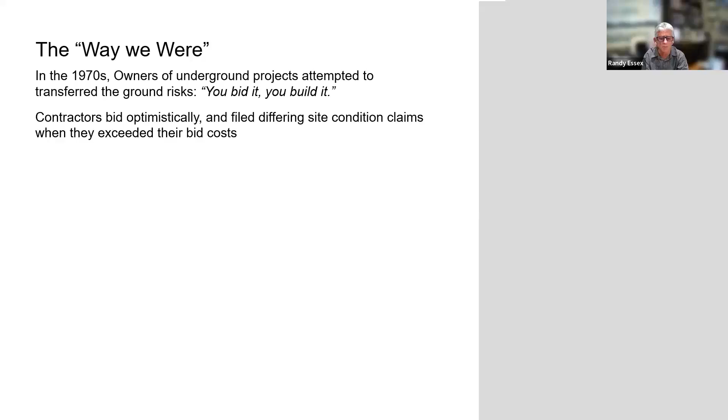When costs exceeded their bid costs, they filed differing site condition claims. The world began to revolve around the construction claims monthly, where you heard the results of various arbitrations and court cases. What we found was litigation was spiraling, and it led to bad publicity for the owners because they weren't getting their jobs completed on time, and poor financials for the contractors. A lot of them got out of the business, or went bankrupt altogether.

Not a good sign. So we realized that in the tunneling industry, if we didn't stop the spiraling of litigation, people would find different products to purchase and would not build their systems with underground work because of the phenomena associated with them. To stop the litigation, the industry produced several research reports.

One in 1974, one in 1984. These were under the National Academy of Sciences, U.S. National Committee on Tunneling Technology. And then the Underground Technology Research Council was formed under the American Society of Civil Engineers, in those days called the Construction Division, now the Construction Institute. They developed a document in '89 and then a quick update in '91.

All of these documents pointed toward four improved contracting practices that needed to be implemented to reverse this trend in litigation. One was a differing site condition clause in the contract. Another was a geotechnical design summary report in the contract. Escrow bid documents by the selected bidder, not necessarily a contract document, but made available and held in escrow. And then a dispute review board. These four were the cornerstone items that the industry felt would be critical to implement if we were to change the current conditions.

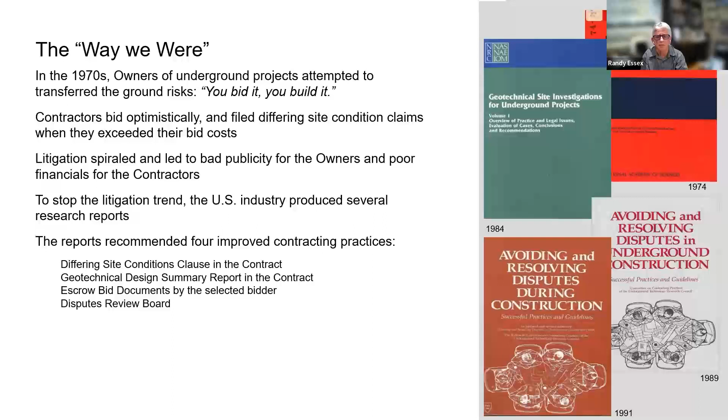Well, the industry said we really need a document on dispute review boards, and some names on this effort. This was the beginning of the Dispute Resolution Board Foundation. This is where it all began. I remember being involved in the late 80s and early 90s on how a DRB should form.

The very first DRB was in 1975 on the Straight Creek Tunnel on Interstate 70 in Colorado. But with growing credibility and very positive statistics, a manual was developed, and now its latest version is obtainable for free on the DRBF website.

Another item they said was we really need a document on these geotechnical reports. In those days we called them geotechnical design reports, and for a lot of reasons we changed the name. I raised my hand and said, okay, I'll lead a committee. We published three different sets of guidelines. The first was the version in '97.

The second, ten years later, earned a reputation globally as the Gold Book. One was just published in the last month or two, with a strip of silver at the top. Maybe we call it platinum, maybe we don't, but maybe we'll just call it the book. That's the latest compilation of lessons learned—and I'd say lessons learned and forgotten—but that's the latest and greatest.

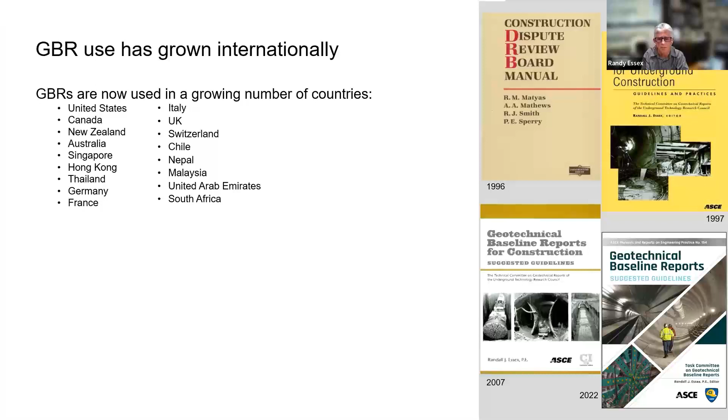The reality is GBR use has grown internationally. These are just some of the areas around the world using geotechnical baseline reports, and as you can imagine, they're also using different forms of contract. The GBR is not a plug and play phenomenon—it has to conform with the general conditions of contract wherever construction is being implemented. That's something we'll touch on briefly and get to a little later.

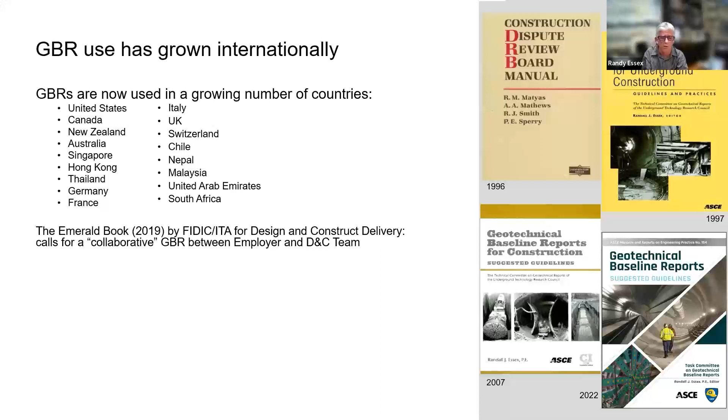The Emerald Book was jointly produced by FIDIC and the International Tunneling Association. The Yellow Book is FIDIC's design build guideline, and the Emerald Book is a variation of the Yellow Book specifically for underground construction. They require a collaborative geotechnical baseline report between the employer—we call them owners—and the design and construct team.

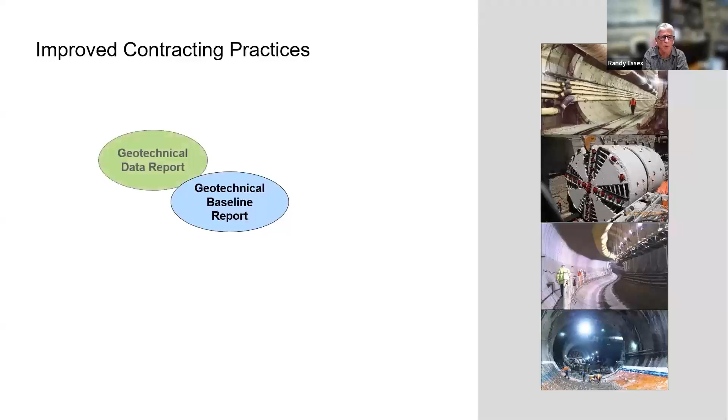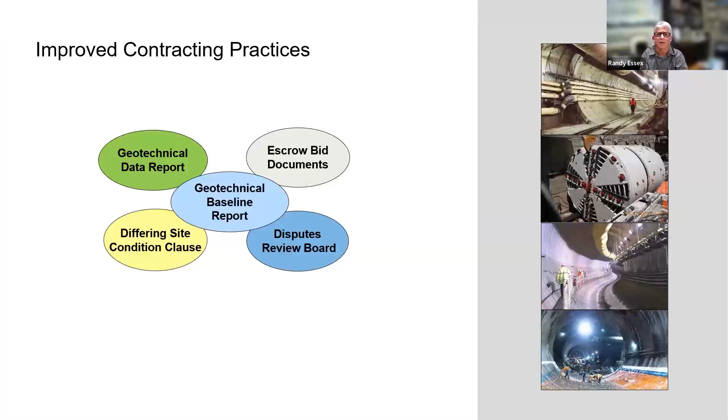So for improved contracting practices, we've got the baseline report, the geotechnical data report, the differing site conditions clause, escrow bid documents, and the dispute review board. The geotechnical baseline report does not function and is not effective by itself. It's not a silo, it's not a pedestal. It demands integration in development of the documents, and also in execution and resolution of disputes, to ensure each element in the contract does its job. The dispute review board is a critical element of ensuring fair contracting is implemented, not just at notice to proceed, but throughout the work.

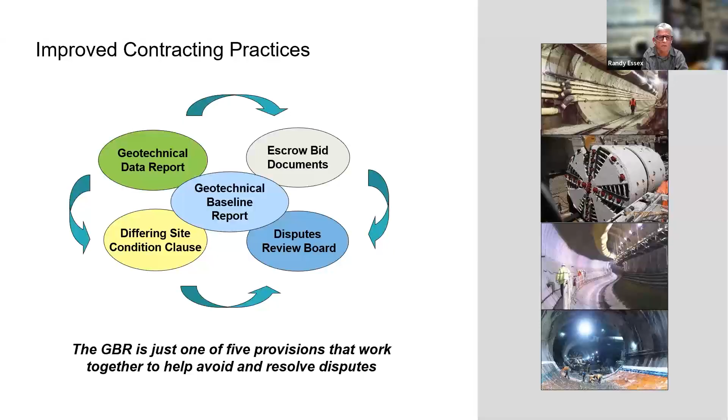Some of the fundamentals of GBR owner's obligations: the owner owns the ground. The owner should expect to pay a fair price for the work required to be performed by the contractor for all conditions encountered during the work, whether known at time of bid or not. If we had X-ray vision, we could see the ground, assess all the risks, and wouldn't have to worry about a differing site condition clause—but we don't have X-ray vision.

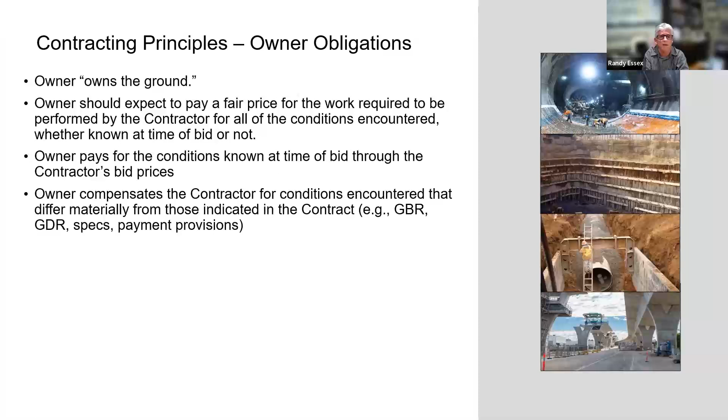Owners pay for conditions known at time of bid through the contractor's bid prices, and they need to understand the importance of compensating the contractor for conditions encountered during construction that differ materially from those indicated in the contract. It's not just the GBR—it can be in the payment provisions, it can be in the specifications. It varies with how the contract documents are developed.

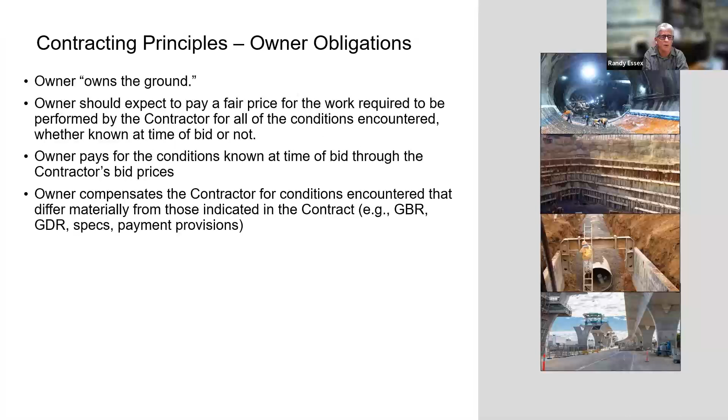On the contractor's obligation side, the contractor owns the risk for all ground conditions and risks identified in the contract, including the GBR, the data, the specs, the payment provisions, etc. Contractors are responsible for the means and methods and any events and impacts associated with those means and methods not specifically related to ground conditions—workmanship, downtime for delays.

It's important that a contractor has every right to bid below the baseline, but they take on commercial risk in doing so. When a differing site condition circumstance arises, it's not about what the contractor's bid price reflected—it's about what the costs of the work were as reflected in the baseline. These have value not just in the contract, but in the bidding process.

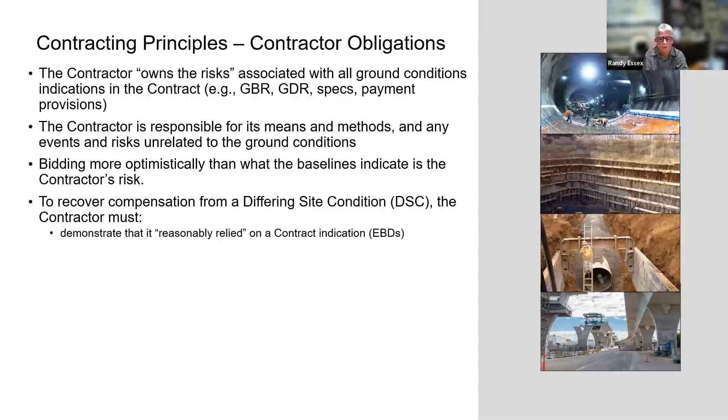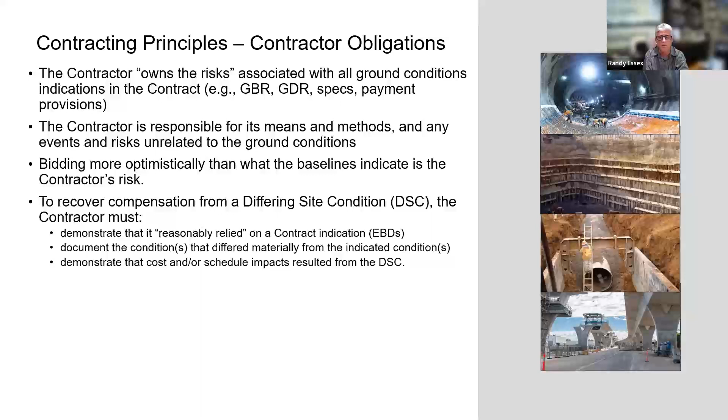So for a contractor to receive compensation under the DSC clause, they've got to demonstrate that they reasonably relied on the contract indications. The value of escrow bid documents is that for contractors who bid fair and square, they value EBDs as a means for verifying what they based their bid on. They need to document the conditions that differed materially from those indicated, and they need to demonstrate cost and/or schedule impacts resulting from those DSCs. Those are the three chains in the process, and they need to meet every one of them.

So it's not a risk-free proposition for the contractor to have a GBR on the job. There are a lot of responsibilities the contractor continues to carry. Basically, the GBR is a risk allocation document. Think of it as a line in the sand: on one side within the baselines is the contractor's risk, and beyond the baselines is the owner's risk. There are a variety of ways of managing those risks.

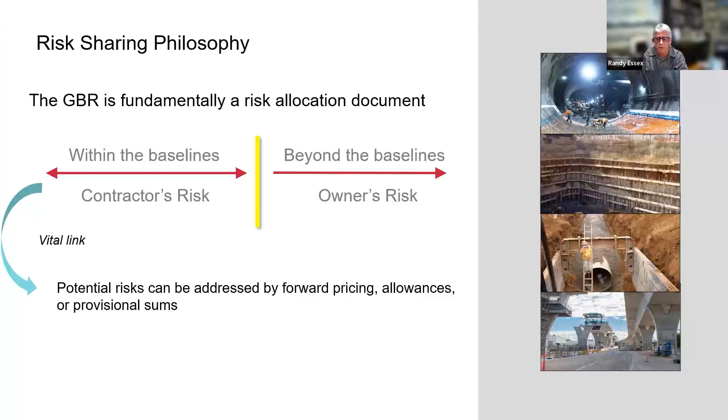Potential risks not in the bid can be addressed by forward pricing, allowances, provisional sums, and how we connect those clauses is a vital link that determines how the contract performs, so that we're able to resolve disputes through contract administration, not dispute resolution.

So the data report versus the baseline report. The data report is factual. It's all the information obtained during exploration and lab testing: boring logs, laboratory test results, photos of lab samples, etc. No interpretation, just the data.

On the baseline report side, it's the single contractual interpretation of the expected subsurface conditions, and it's a level playing field because all bidders bid the same set of conditions. There are physical baselines that talk about intrinsic properties of the ground, and behavioral baselines that connect with the means and methods the contractor implements during construction.

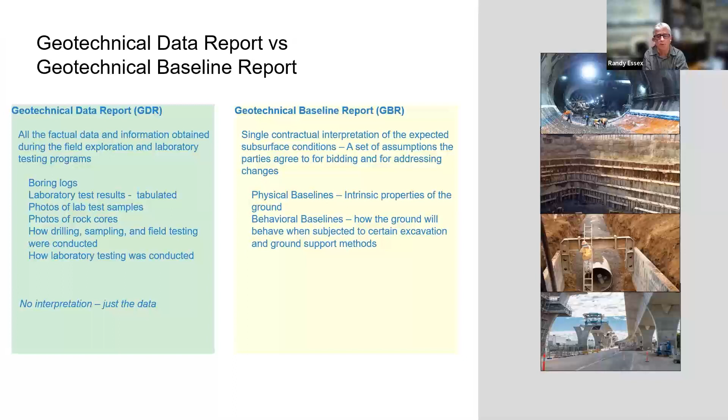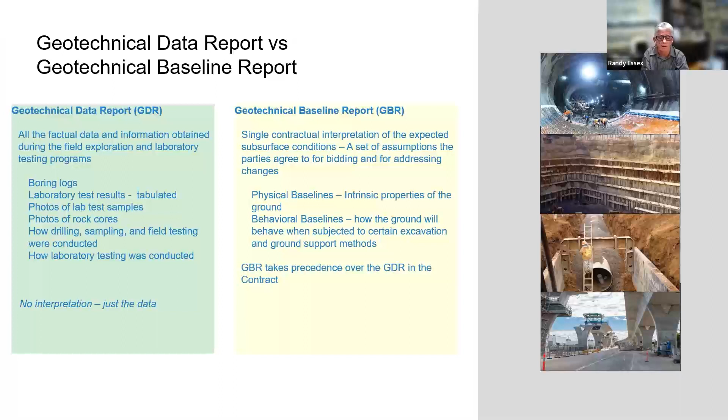The GBR takes precedence over the GDR in the contract because the GBR can be based on matters other than just the data. I'll talk about that a little bit later.

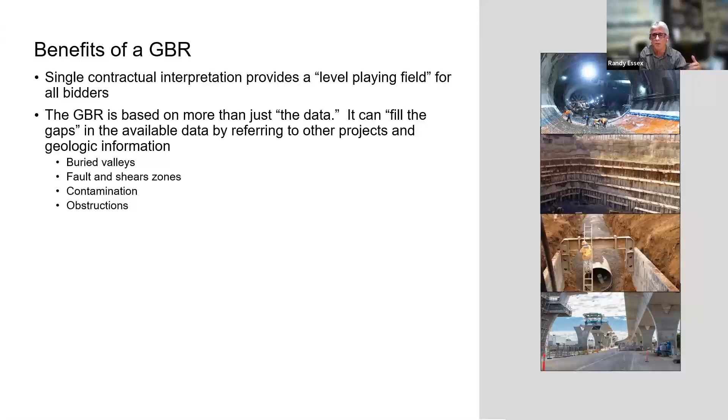Some of the benefits are named here. If there's a geologic model like a Horst and Graben system up in the peninsula in Michigan, that structural geology gives rise to vertical joints. Vertical borings are not effective or efficient means of detecting vertical joints, and it's very difficult to detect boulders, degree of contamination, or obstructions. So there's an opportunity for the GBR to contain provisional baselines that go well beyond the data, and that's why the GBR takes precedent over the data report in the contract hierarchy.

So other benefits: because we have a tool, the DRB can say, well, let's look at what was indicated in the GBR. What did the contractor price, and how did the conditions encountered differ from those indicated? Hopefully there's less acrimony, stronger partnerships, particularly using design build, where we emphasize the importance of a collaborative GBR. I'll talk about that in the contents of the updated publication. And there's less distraction from contentious work.

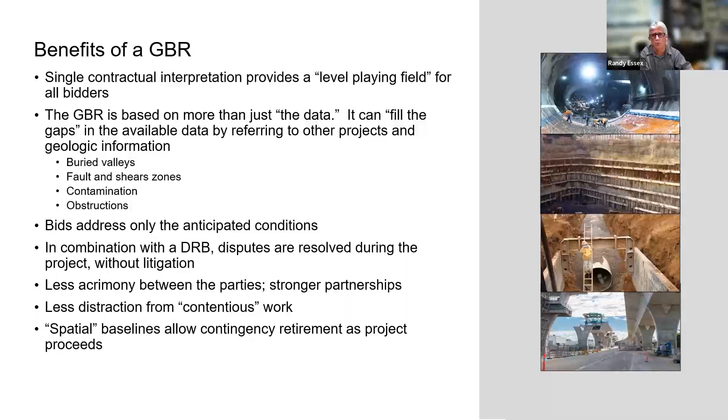There's also an opportunity to create baselines that are spatially oriented. Think of it as tunneling reaches, or maybe just a shaft or whatever. By ascribing discrete baselines for those conditions, you have a contingency fund that looks across the entire job. It gives the owner the opportunity to retire contingencies for specific areas of work as those elements of work are accomplished.

So let's now turn to the new GBR publication. I got to tell you that the process we went through was an intense one. It's the third time we've done it. We picked up on a lot of lessons learned from the first two. We developed a committee, and the first group were what we called the writing subcommittee, a cross-section of individuals from the industry.

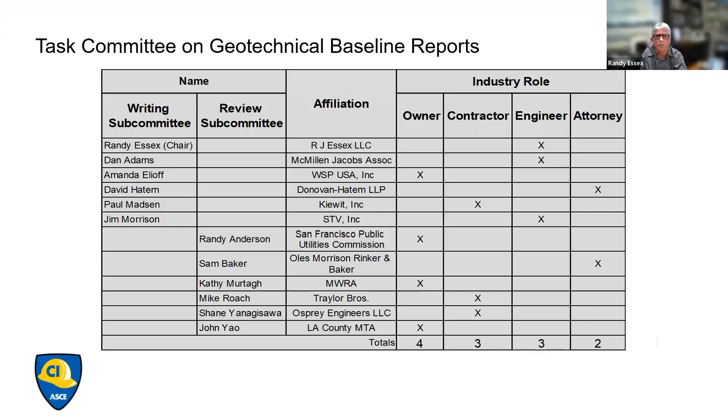We also had a review subcommittee, also a cross-section of individuals handpicked from the industry. As you can see, it was a blended group of individuals: 4 owners, 3 contractors, 3 engineers, and 2 attorneys.

And what was the update process? Well, we started in June and July of 2021, and we formed this committee, both the writing and review subcommittees. In August through September, the writing committee primarily focused on what's broken, what we need to fix, and what the elements should be that we frame for the very first working session, where we reach out to the industry in a workshop held in conjunction with the Cutting Edge Conference in November.

They fed back on the items they felt were broken, what was working from the Gold Book standpoint, and what wasn't. But one thing we found was that while well attended, with some 65 attendees, they were primarily engineers. There wasn't enough feedback from owners and contractors. So during subsequent months, we had specific outreach to owners and contractors and got their feedback.

Based on that collective information, we wrote a manuscript, and then in March we sent it to the review committee for review. We took their comments in April, incorporated them, and created an updated manuscript, distributing it to some 50 registration attendees at a workshop at the George Fox Conference in May.

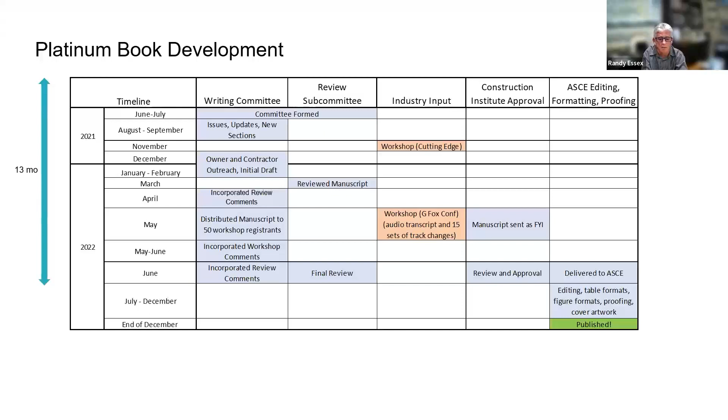We delivered the final work product at the very end of June, beginning of July to ASCE. From that point, we began an editing and formatting effort, and that took a long time. At the end of December, we published it. So in retrospect, it took us 13 months to extract feedback from the industry and produce the publication, and another 6 months for ASCE to publish it because they had strict formats. It's an involved process, and it was fairly intense.

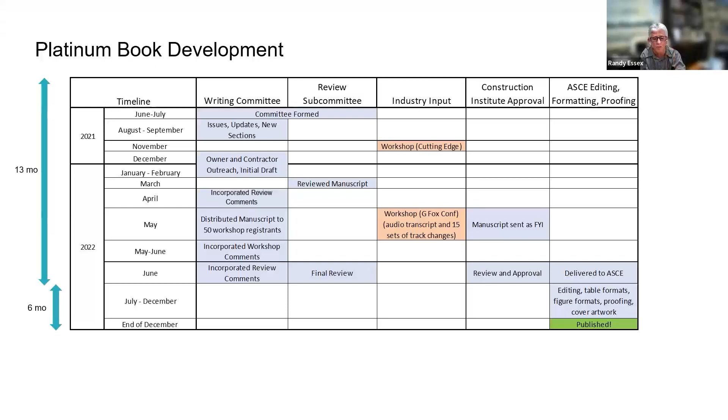Over those 13 months, we had conference calls every Monday by standing order. If we didn't need it, we canceled it, but it kept the metronome, the staccato version. And we think we've developed a fairly tight document.

Table of contents. Al Mathews was one of my mentors. He was a driving force in some of those early publications, and a driving force in the creation of the Dispute Resolution Board Foundation. There's an annual award given in his name. He certainly deserves to have this dedication.

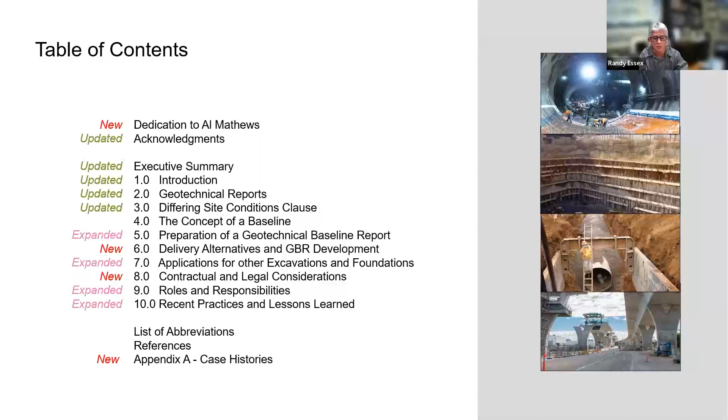These are the new chapters that have been created, or pieces of text. These are the chapters that have substantially been expanded, and these chapters have been updated. I've got to say that the amount of change we've achieved between the gold and the platinum greatly exceeds the changes we executed between yellow and gold, so there's a lot more work that went into this effort.

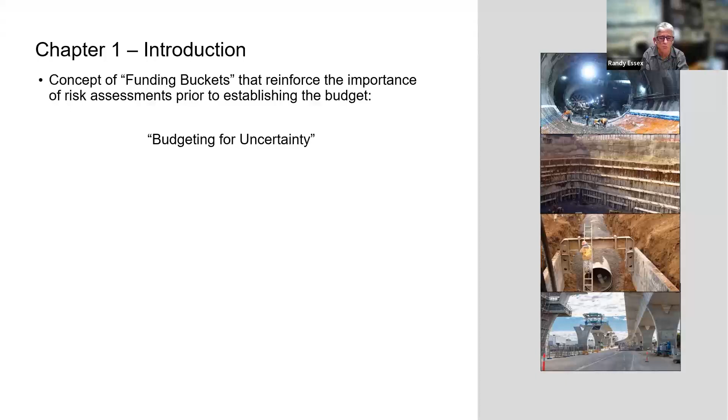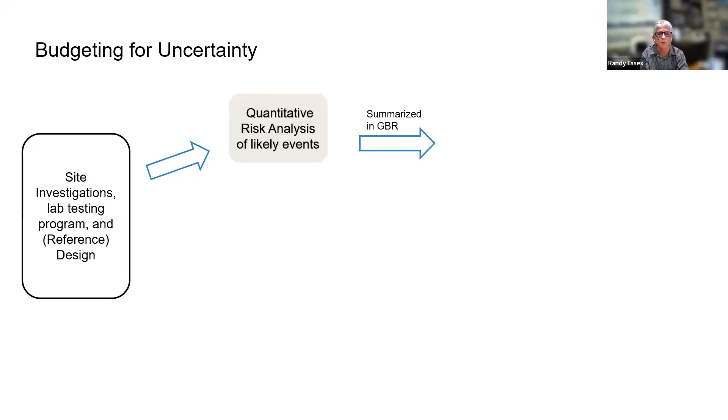In chapter 1, I would say the key message is budgeting for uncertainty, and we have this graphic in there. Really, the GBR is the consequence of a risk assessment strategy. We're finding that projects aren't implementing risk analyses sufficiently and thoroughly—site investigations, lab testing, whether you're doing a design-build where you're creating a reference design, or design-bid-build as a guideline design. You identify through a quantitative risk analysis what the likely events are that you expect to occur on the job, and those are the circumstances summarized in the geotechnical baseline report.

How you fund that work is, let's call it a blue bucket. These are the known knowns, and whether it's a target price or a bid, that's where the contract is established around what we think we're going to encounter during the work.

Well, there may be some elements in the work that are known to occur, but we don't know how much they're going to occur—obstructions of man-made features, leftover from past construction. This happens often in urban areas. Hyperbaric interventions are going to be necessary, but how many? And contamination—disposal costs are horrendous impacts to the job. We need a way of measuring and compensating the contractor for just how much contamination has to be handled, tested, and disposed of.

So we set nominal baseline limits for these costly items. If we included conservative estimates, it might blow the blue bucket out of the water. So we set more nominal baselines, and we can set aside provisional sums in a separate bucket for these medium probability, high cost elements—those are the known unknowns. The value is that those are only paid by the owner to the contractor if the quantities are exceeded. The most important stage, I feel, in terms of overall understanding of our underground business, is to conduct a quantitative risk analysis of the unlikely events.

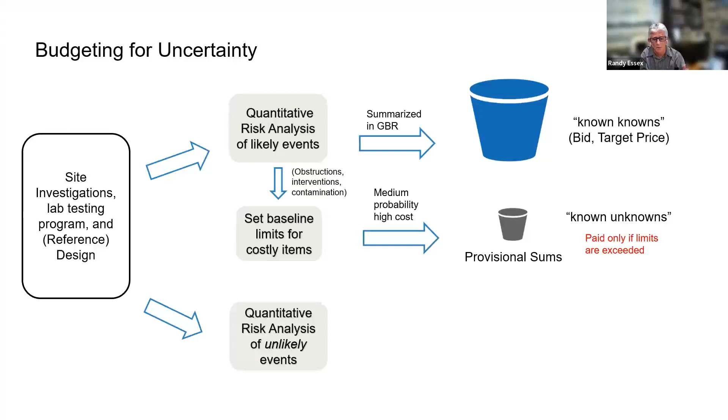And it's just not my opinion—everybody, this really rang the bell with everyone saying this needs to be done. It's not being done, and it can cause a greater awareness of what's happening if we do it. So these are the unlikely events likely to occur—low probability, potentially high cost. Whether we look at it at P50 or P95, the consummate cost of dealing with those high cost items is built into a contingency fund.

And that is the unknown unknowns that can only be discovered during construction. Again, as for the provisional sums, they are paid only if conditions are encountered.

Now, this is the punchline: some owners feel that the blue bucket is their budget. In reality, all three buckets need to be their budget. We're finding that if owners participate in the risk analysis of unlikely events, and understand what the contingency fund is there for, they've accounted for it. When it comes to paying a claim, it's not viewed as a loss, it's viewed as a cost.

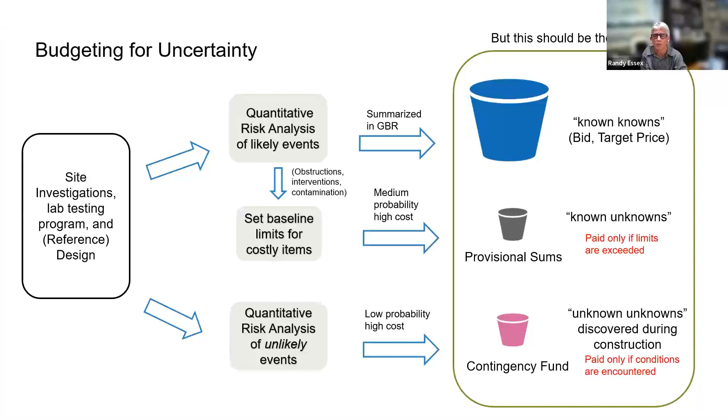I think it doesn't need to be any more complicated than that to understand that the ground conditions are what we know at time of bid and what we encountered during construction that we didn't know at time of bid. If we can manage our process this way, hopefully we require fewer dispute review boards and other elements of dispute resolution. So chapter 5, preparation of a geotechnical baseline report.

We provide a suggested outline that I'll show you. There's a concept of trying to shrink the size of the GBR. It should not be a master's thesis, it should be short and snappy so that contractors can understand it quickly. Focus on the construction. Design matters are not typically the drivers of claims, which is why we changed the title of the document from Geotechnical Design Summary Report to Baseline Report for Construction, parenthetically.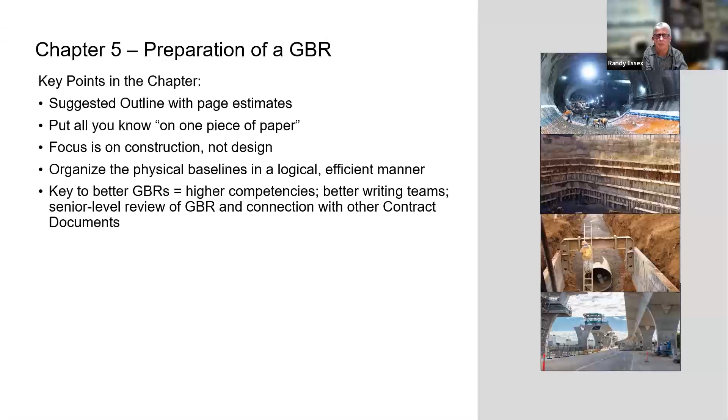Organize the physical baselines in a logical, efficient, and visual manner. We're finding that if we assemble GBR writing teams with the right experience, the right expertise, the right qualifications, this will result in a better work product, and we'll have less disagreement about what the GBR intended to convey. I'll talk about that a little bit later as well.

So this is the outline that is suggested in the guidelines, and it's based on dozens, if not hundreds, of GBRs that have worked. This is a very efficient technique that's worked for simple projects and the most complicated transit projects.

This is the challenge. We recommend page counts because we found that GBRs are being written by people who seem to emphasize being repetitive, redundant, and duplicative, if you get my point. Say it once, say it the best way you can, and cross-reference from there on. Those first 5 chapters should take no more than 7 pages.

The ground characterization, depending on the complexity of the geologic setting, can take anywhere from 12 to 17 pages. If they're taking 30 pages, they're writing a thesis. And it's a good cross-check to say, trim it back.

Don't restate what's in the geotechnical data report. Just focus on the stuff that's critical on the job to resolving disputes. We don't need to baseline Poisson's ratio. We don't need the baseline modulus of subgrade reaction. Those are design parameters, and we can baseline those types of parameters elsewhere. But this area focuses on what elements of the ground will most influence the construction.

Previous relevant construction experience is critical, 2 to 4 pages, depending on how evolved the environment is for tunneling construction. Construction considerations is really the behavioral phenomena tied to means and methods, and depending again on the complexity of the ground and the different components of construction to be implemented, this can run from 10 to 15 pages.

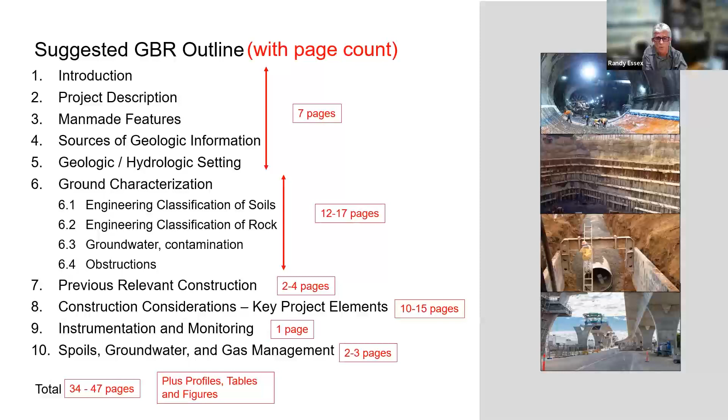This is quite manageable. We just implemented a very complicated P3 project under Queen Street in Toronto. It's part of the Ontario line, and I believe the page count was something like 42 pages. It doesn't need to be a tome. It can be short and snappy, and this will help authors and reviewers of documents guide to be sure that we pare this down to just the essentials.

So present baselines once without repeating. How can we do this?

We need to write descriptions once, then cross-reference them. Physical baselines are most effectively conveyed visually. I'll show you an example.

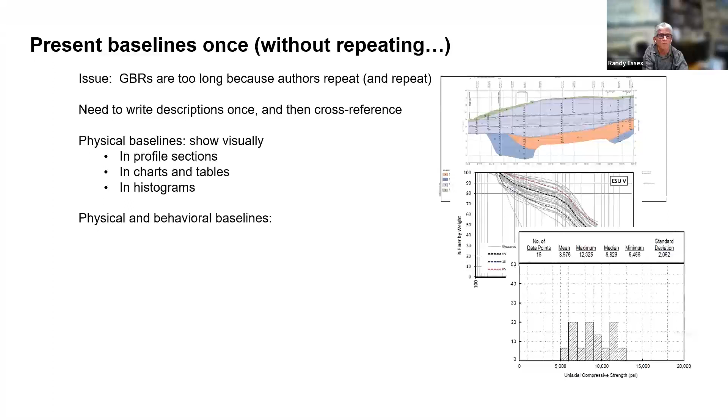There are geologic profiles. We can have soil gradation curves, histograms - these are very visual. For physical and behavioral baselines, we can have a single table, consolidating the physical and behavioral all on one piece of paper. One of my first bosses was Arthur Chase with the A.A. Mathews Company, and he said, put everything you know on one piece of paper. That's the mantra, and it works.

Group strata and ground types by engineering classes. We find that baselining according to geologic nomenclature doesn't work. A good example: on the Beacon Hill project, there were 27 different strata that could have been baselined - Vashon, pre-Vashon, these are glacial deposits. We were able to consolidate those 27 different strata into 6 different engineering classes, and we baselined them.

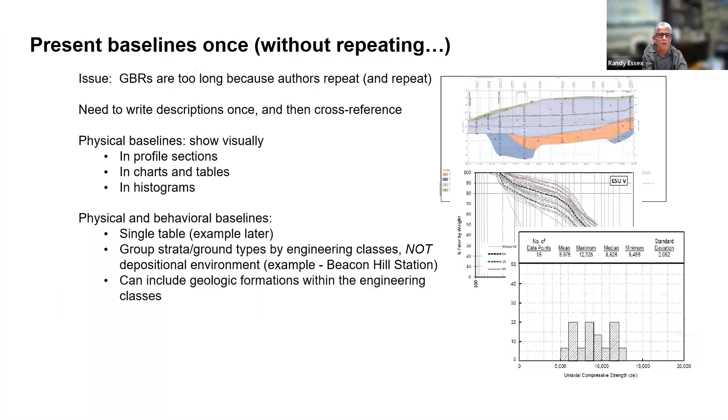We can include the geologic formation nomenclature within the engineering class definitions. That's certainly possible. What you find out is you can have more than one geologic stratum behaving in a like manner. The kind of stuff that controls ground behavior during construction is not what name we gave it in the geologic storytelling - it's how do we expect the ground to behave.

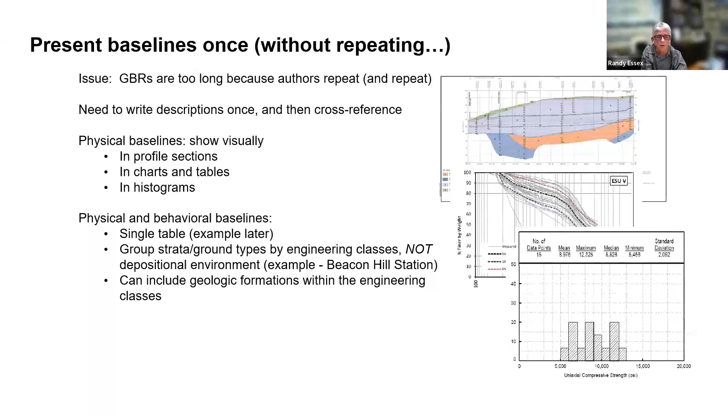This is an example of a different project we did for a transit job in Toronto. In the first column is the engineering class. The colors are coincident with the geologic profile. We provide a material description of the engineering class, with a connection to the geologic nomenclature to see what materials associate with those behaviors.

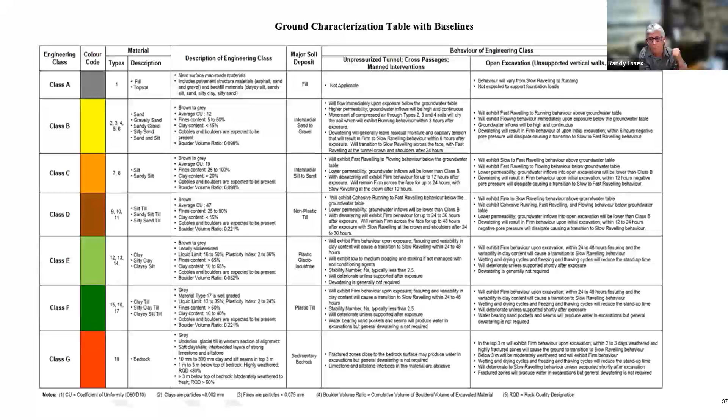These columns describe what the anticipated behaviors will be, either in the subaqueous condition that's unpressurized, or in the open air condition where just gravity is controlling. This table may be more than one sheet, but the value is in the geotechnical baseline report - rather than restating a baseline, it says see table 4-1 for the baseline statements, and they're all here. There are graphs that show material properties physically, and it's perfectly acceptable in the physical characteristics to reference visual characteristics of material properties.

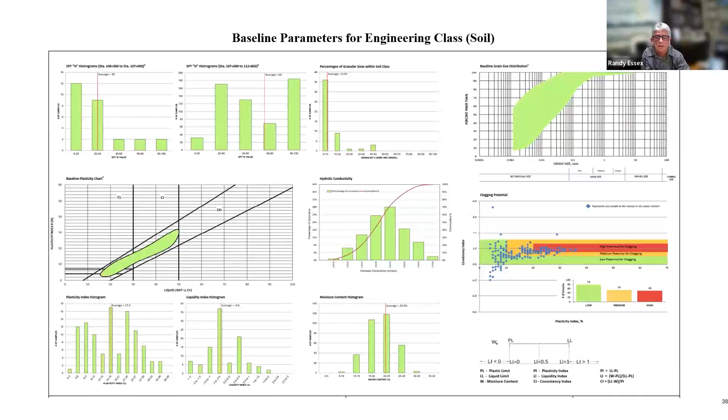Here's an example of one for soils, where SPT blow counts, grain size distribution, plasticity, moisture content - here's an old version of Markus Thewes's clogging potential, and a later version of it. But the beauty is for multiple strata to have the same information for each soil class presented in the same graphic concept. You begin to learn the differences between one stratum and another simply by looking and comparing the histograms and the charts, table to table to table.

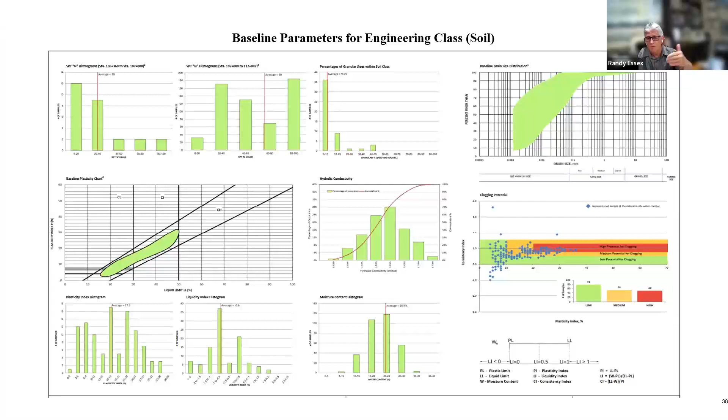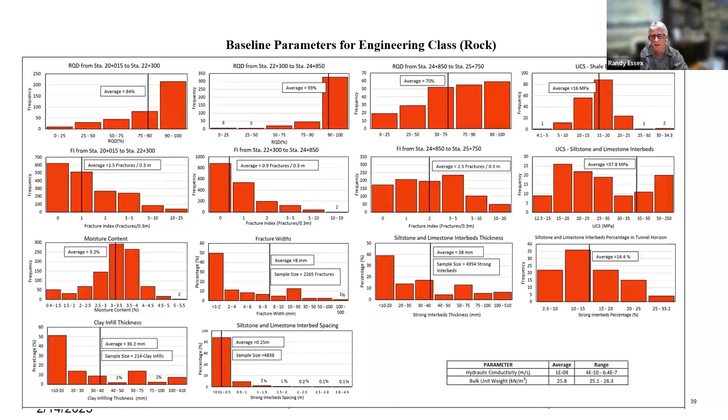Again, each rock formation or each engineering class can be stacked in the same fashion so that we develop a visual mechanism. Using these tables probably saves, I'll say, 5 to 7 pages of text and maybe 20 pieces of paper in the document. I think it shows value - put it on one piece of paper. It's going to be a lot easier for people to understand and integrate and price.

So baselines can also be sentences, and these are warnings of anticipated behavior in the construction considerations. The soft ground soils can be expected to exhibit flowing conditions if balancing face pressures are not maintained by the EPBM at all times. That's a risk transfer - this ground will be unstable, and there'll be consequences if that instability is able to manifest.

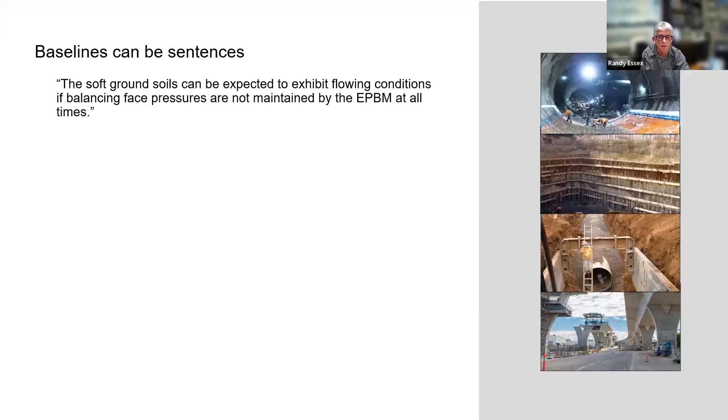There's a couple of others here, but in time I'll move on. There are plenty of examples that can pop up, and there are some in the case history section at the end of the publication.

This is where there was a Dispute Review Board Foundation workshop at the RETC in 2021, and one of the conclusions from that workshop was, if we could write better GBRs, we'd have fewer disputes. It all begins with having a multidisciplinary team participate in the writing of the GBR. It starts with an engineering geologist who understands the geologic setting, conceives of a ground model of what the geologic conditions will be on a micro scale and a macro scale.

Some of these features may not be detectable by investigation, so it's valuable. The geotechnical engineer is one who deduces the ground characterization from exploration and develops these parameters, and is also able to connect those parameters to other elements of the specifications. The construction specialist needs to weigh in on understanding the equipment, the means and methods, and the diverse ground behavior and conditions that will have to be overcome.

Elements like gas, obstructions, contaminations, sensitive facilities are all critical in understanding what tools the contractor has to bring to the job and what risks need to be described in the geotechnical baseline report, so they gain an appreciation in what is a fairly short tender period.

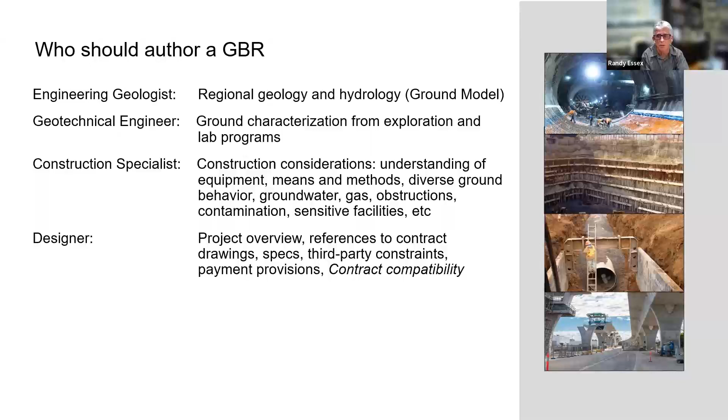The designer takes this information and makes sure that there's effective connectivity between what's written in the GBR and what's written in the specifications and shown on the drawings. Third-party constraints, payment provisions - the key is contract compatibility. And if you can resolve the compatibility among these different contract documents, you're probably eliminating three-quarters of your risk.

One key concern: just because geotechnical is in the title does not mean that the GBR should be written solely by a geotech. Where we have this go on is owners say, well, we're going to have this geotechnical consultant do the exploration, and they're going to write the geotechnical baseline report. That is not a workable scheme.

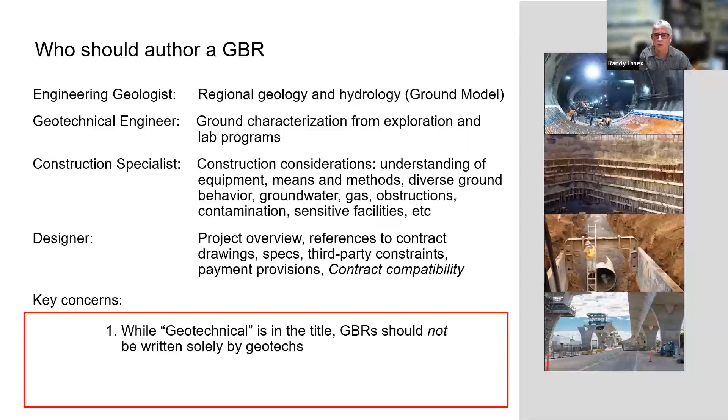You have to have one who's developing the design understand how to connect the GBR to the specs and what construction constraints are imposed, because they may limit certain means and methods. That element also has to be in the GBR. It can't just be written by the geotech. The GBR must be prepared and reviewed by professionals with the right competencies and the right experience, and this is pretty heavily reinforced in the guidelines.

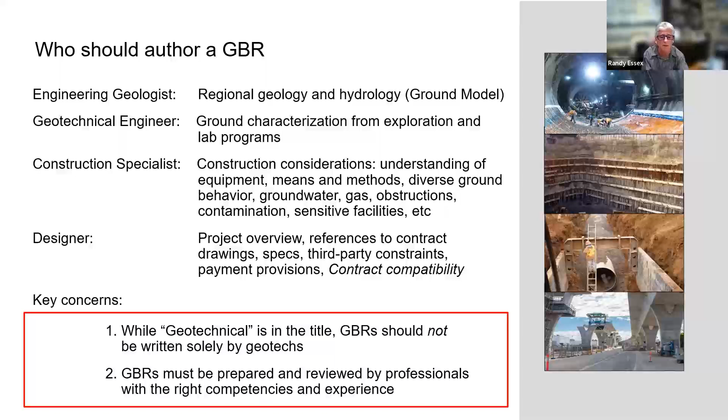Delivery of alternatives. One thing that's going south in this industry is owners like to use design build, but they're not really implementing design build. Design bid build is rarely being used, but in one workshop I asked the question, is design bid build dead? And the response was no, because we really know what we're getting.

So we've got to get back on the rails to understand what's required for design build. And the same rules that apply to design bid build should apply to design build as well.

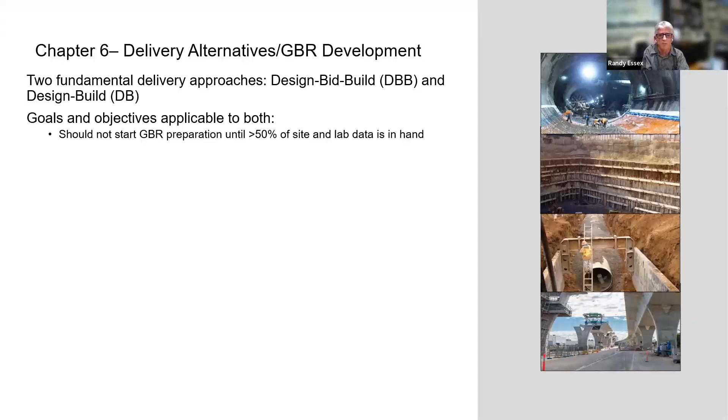You really shouldn't start the GBR preparation until more than 50% of the site and lab data is in hand. Another is you don't issue a notice to proceed for construction until site exploration is substantially completed and reflected in the GBR. This idea of providing principally design-focused exploration to develop a reference design and then telling a contractor in design build after award to implement its exploration program is doomed to failure.

And there are a number of projects in the past, and going on right now, where claims are raging because of new indications that were found in post-award site exploration programs.

The GBR should reflect the actual equipment, means, and methods that the contractor intends to use - not having the owner guess at what might happen. That doesn't work, it's like two ships passing in the night, if the GBR focuses on one set of means and methods and issues, and the contractor bids something totally separate.

The key differences between design bid build and design build are aligned primarily by who employs the designer. For design bid build, the designer works with the owner, and they wind up with a very strong relationship, and there's a very effective link between what the owner's risk profile is and what goes into the documents as managed by the designer.

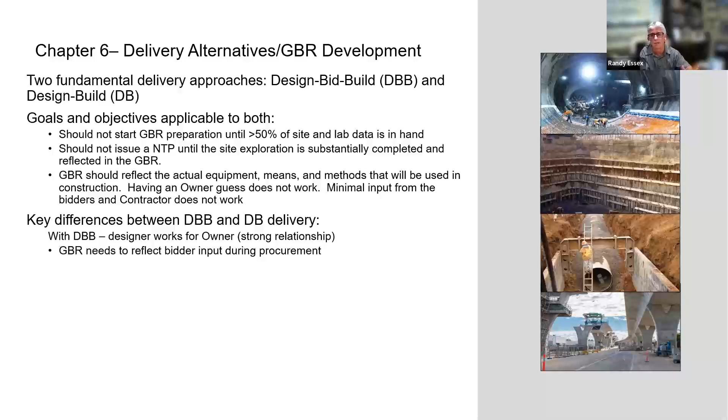The GBR needs to reflect the bidder's input during procurement as well. You can have RFIs, and there needs to be a willingness for the owner to adapt, modify, and resolve ambiguities raised in the procurement process for design bid build.

For design build, the designer does not work for the owner, and they may have a poor or non-existent relationship. It may be strained because there's three horses in the design build race, yet the owner seeks the full design risk transfer.

There's other elements that go on with that risk transfer that have to be understood, and it's not going to be well understood, because the owner really doesn't get to talk to the engineer about what they're thinking. There's also a poor link between the owner and the contractor. The GBR helps fill this gap.

It requires close collaboration between the owner's initiation of the GBR and the design build team during the tender process. So having a collaborative GBR developed is described for a number of different delivery methods in the guidelines, and it really follows a lot of the virtues that the FIDIC Emerald book reinforces, and there are variations on the theme in the guidelines.

ECI, CMAR, GCCM - these are all with the owner employing the engineer, and they're variations on the theme for how you get the construction manager and the contractor on board earlier in the process so that you can have this interaction.

Anyway, chapter 7, applications for other excavations and foundations. This is conveyed in the images on the screen. We found that there are other things subject to claims besides tunnels and shafts, and chapter 7 addresses that benefit.

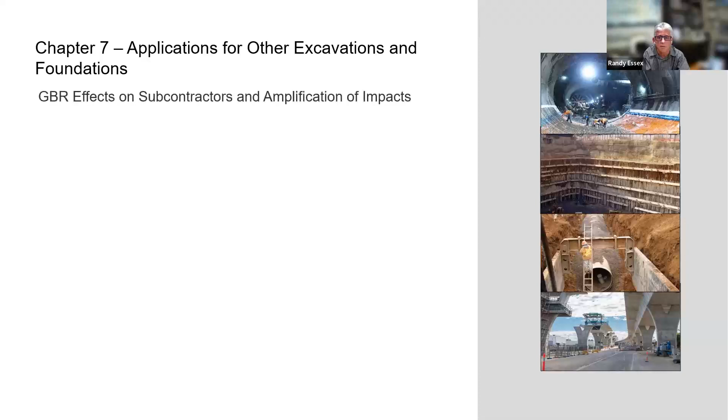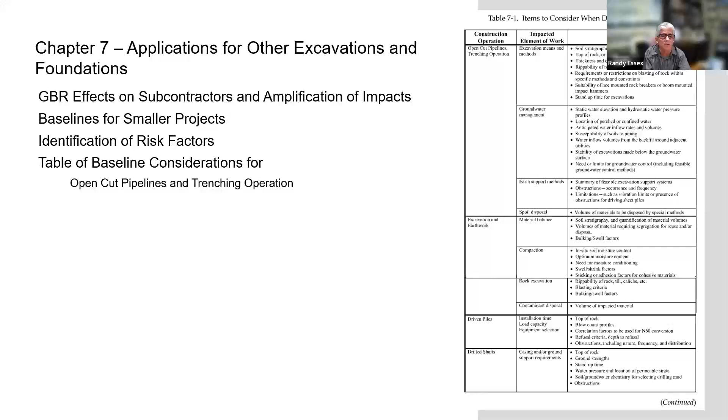These are some of the issues identified. It's a 3-page table. We look at baselines for open cut pipelines, earthworks, driven piles, drilled shafts, slurry walls, ground freezing, tiebacks and anchors, scaling of ground slopes, and horizontal directional drilling. Microtunneling is addressed as tunneling, but this is a little different, spelled out here. Dams and levees, and grouting, which is permeation grouting versus jet grouting - two different phenomena, and their successes depend on two different pieces of information.

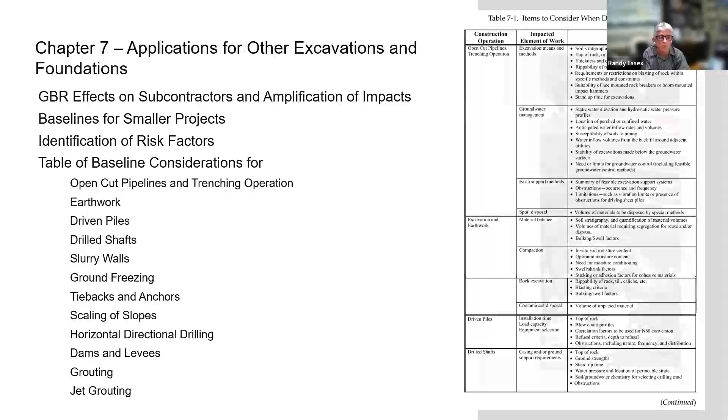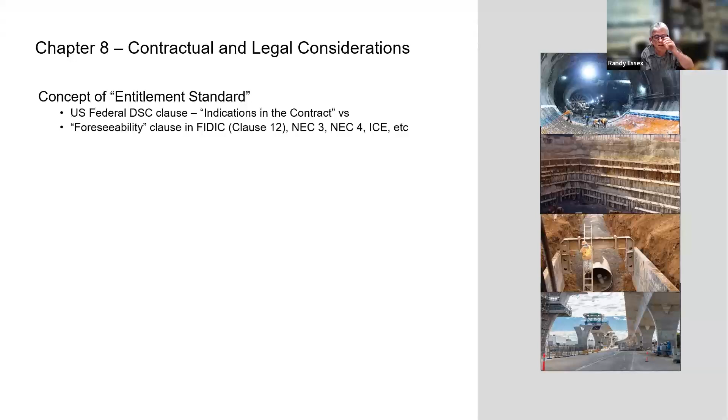So that's chapter 7. Chapter 8 is an involved effort. I think it's going to be best read by everyone because it gets into a lot of the nitty-gritty that begins to contrast our form of contract in North America versus other forms of contract elsewhere in the world, and how you address variations or different site condition claims is different. Therefore, GBRs are not plug and play, and GBRs cannot be the sole basis for determining what is foreseeable.

This term foreseeable is a trip hazard, and it exists in NEC 3, NEC 4, in ICE contracts, in FIDIC, and more work needs to be done to perceive that the GBR is not the sole indicator of what the baseline conditions will or will not be. It's the contract - there are other elements in the contract documents.

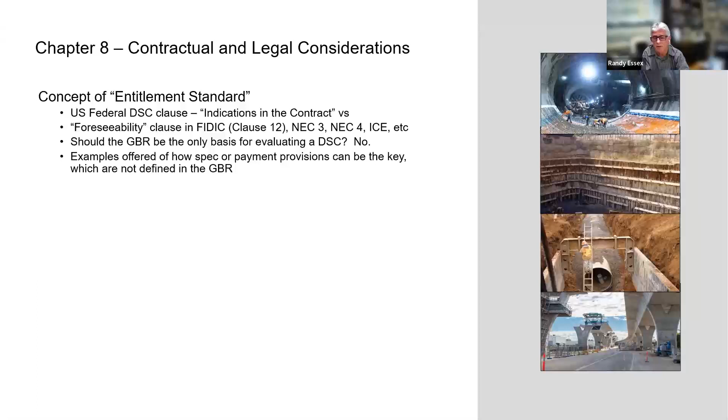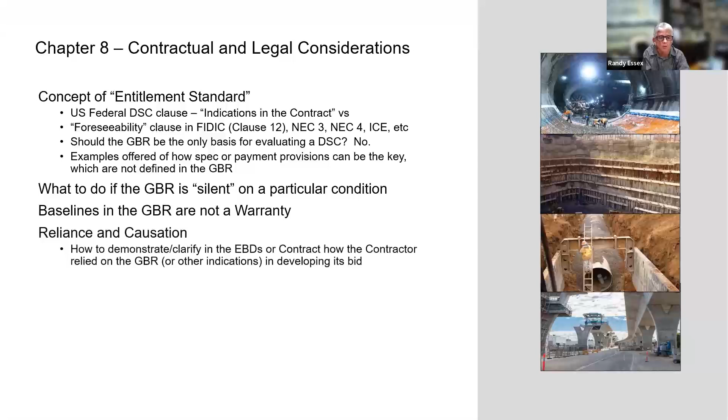What if the GBR is silent on a particular condition? The text addresses these issues. Causation - what establishes the material difference? These are some of the topics that are addressed, so it's going to be an interesting read. We didn't talk about these types of issues before to this degree of specificity. It's going to be a benefit.

Recent practices, lessons learned. This is where I'm saying that the DRB Foundation in 2021 talked about the fact that if we could write better GBRs, we'd get better outcomes. Why are GBRs decreasing in quality, and what needs to be done to reverse the trend?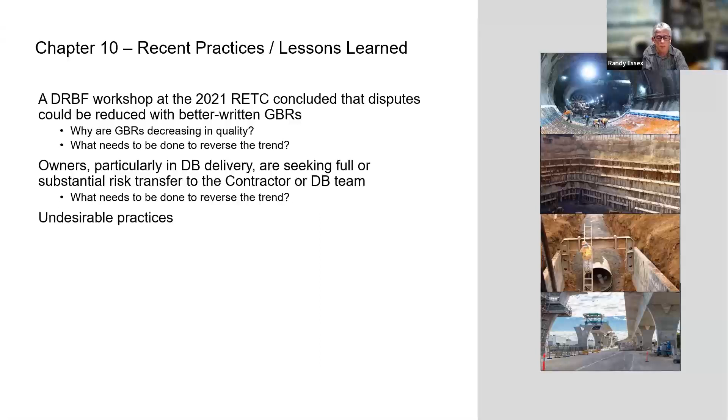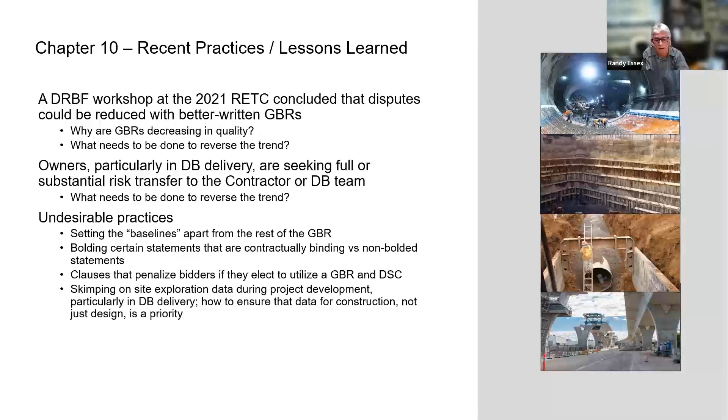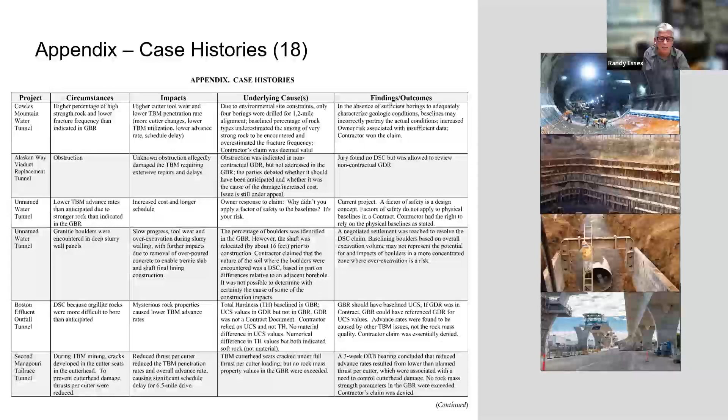Finally, there's an appendix that's brand new to this edition. There are 18 case histories, and what we're trying to do is demonstrate the intent to provide examples of real disputes and how they were resolved considering GBR baselines and statements, as well as other information in the contract.

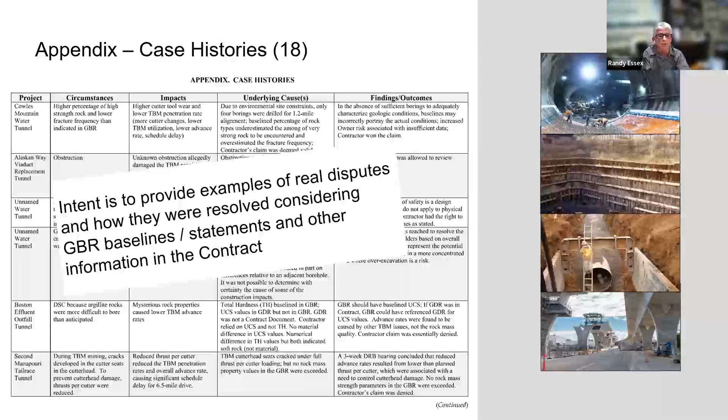So the Gold book is now available. If you Google it, you'll find that ASCE's book department has access for both a soft cover book and an ebook version. You can also find this for sale on Amazon, both in paperback and Kindle. From my understanding, Kindle is in Kindle speak - it's not the same as a PDF, but you do obviate the need for shipping costs.